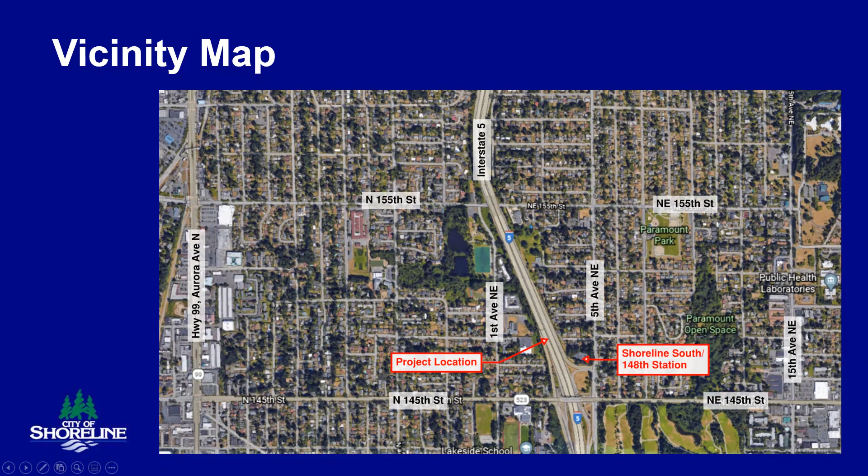Next slide. How did we get here? In 2016, the city developed a new sub area plan, which changed the density of the area. And as a result, City Council identified a need for a new crossing. And in 2017, the feasibility study was commissioned to identify the best location for that crossing, specifically for bike and pedestrian travelers. You can see that we looked at multiple different options, and the most feasible option that came out of that study is the one we're showing you today, roughly in line with 148th Street, crossing the freeway.

And then at the beginning of the design effort back in 2020, we conducted a type, size, and location analysis to identify different options for connecting from First Avenue on the west side of the freeway to the bridge landing, the different types of bridge structures themselves, and then how best to connect to the new station on the east side of the freeway.

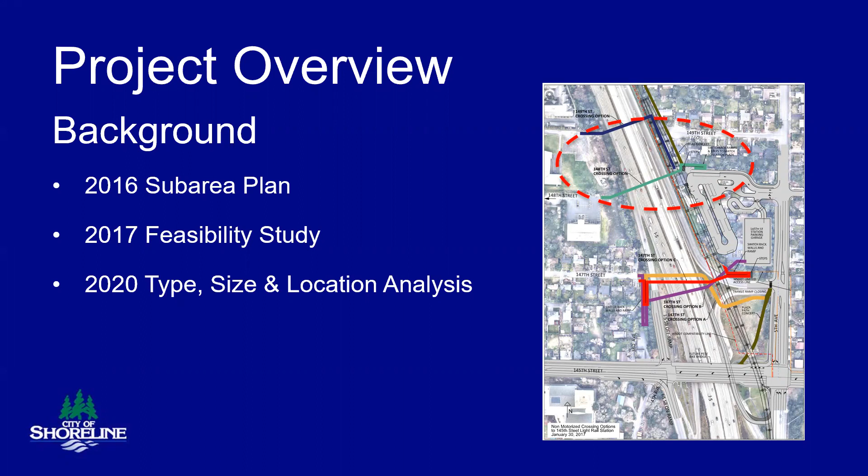The main goals of the project: ultimately provide a new link to the new light rail station, which is also considered a transportation hub. There will be future bus rapid transit. Improve safety and reduce travel times, increase walk shed and bicycle connectivity, and ultimately connect the neighborhoods on the east and west side of the freeway with a new connection.

Design evaluation criteria that has informed the design: user safety and security first and foremost, connectivity and travel times, project cost, appearance, we would like it to look good. How easy is it to operate and maintain, ease of stakeholder approval, and right of way requirements.

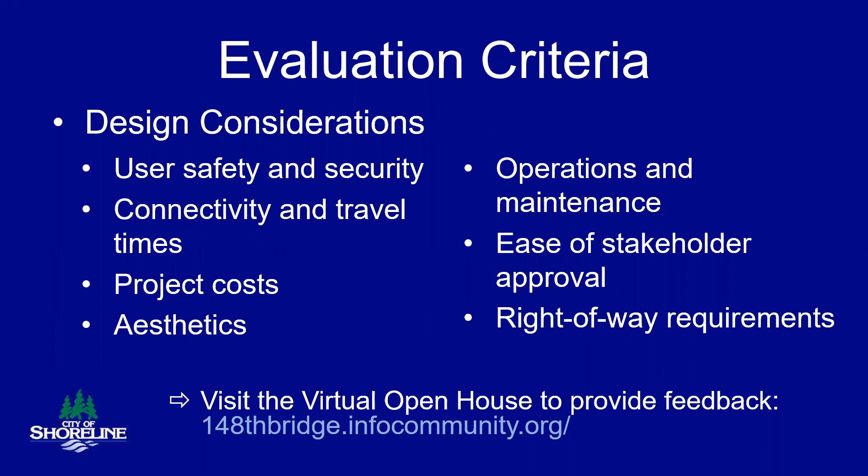I do also want to invite you, if you haven't already, to visit our virtual open house to provide additional feedback. Because as you'll see on the next slide, we do take that public feedback and we do use that to inform the design. At the conclusion of our type, size, and location effort, we collected the feedback and prepared recommendations to City Council where they selected preferred alternatives.

That feedback that we collected came in the form of direct briefings with the churches that are immediately adjacent to the landing on the west side of the freeway, and the communities on east and west immediately adjacent to the bridge. Back at the very beginning of the pandemic, we had our very first virtual open house. In that open house, we had 529 visitors with 165 survey respondents. And we also had an online presentation as part of that effort where we received 66 participants.

And for each of the project design elements, we took the recommendations that came out of all of that outreach effort, which happened to align with the recommendations that we provided to City Council. And that has informed the design where we are today, 60%.

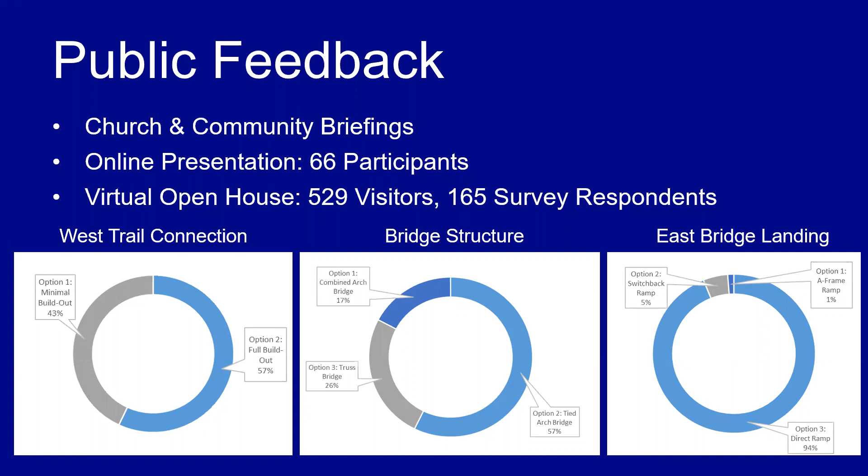Next slide. Also out of that feedback, we heard from you, the public, that the most desired project priorities are to improve pedestrian travel, maintain a safe environment, shorten travel times, preserve trees, and minimize potential parking impacts. So we definitely hear you when you're talking, and we definitely hear your concerns, and we incorporate that information into our design whenever we can.

At this point now, I'm going to turn it over to Aaron. He's going to run you through the design as it currently stands. Aaron. Thanks, Lee. So I'm going to run through the main three components of the project. Lee's already alluded to these a little bit during his introduction there.

The first component is the West Trail connection that provides an at-grade connection from First Avenue on the west side of the freeway to the bridge structure itself. I'll talk a little bit about the bridge and how it crosses the freeway, and then we'll wrap up with a brief description of the East Bridge landing and how the trail and bridge interact with the Shoreline South 148th Street station and the future trail along the rail project.

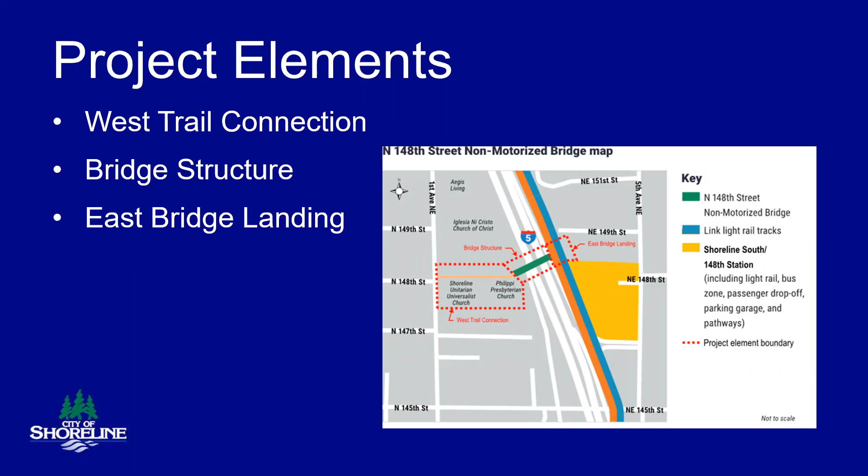Also along the trail are some proposed landscape improvements. You'll see some new trees along the south side of the trail. There's also pedestrian scale lighting in the form of luminaires or light poles along the entire length of the trail until you reach the bridge landing area, where those light poles transition to handrail mounted lights. And the whole purpose of all of this lighting is to improve user safety and security.

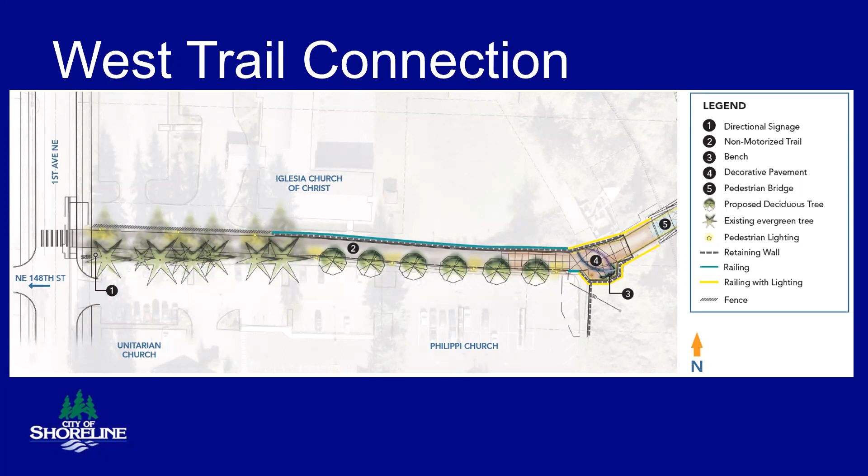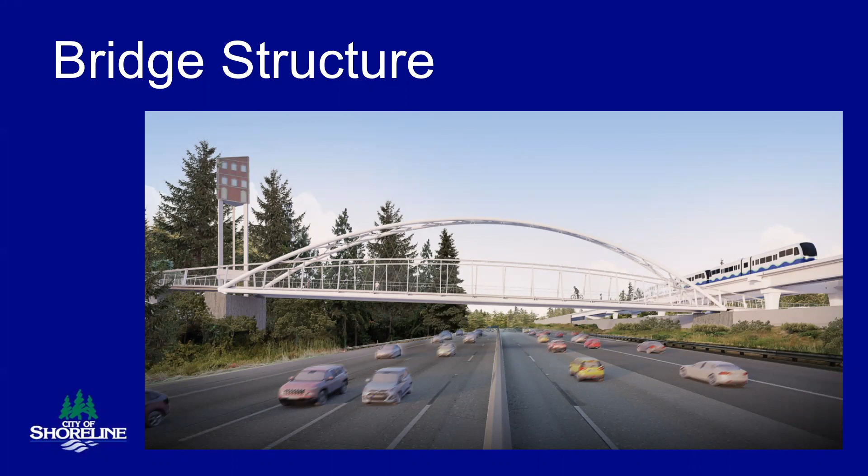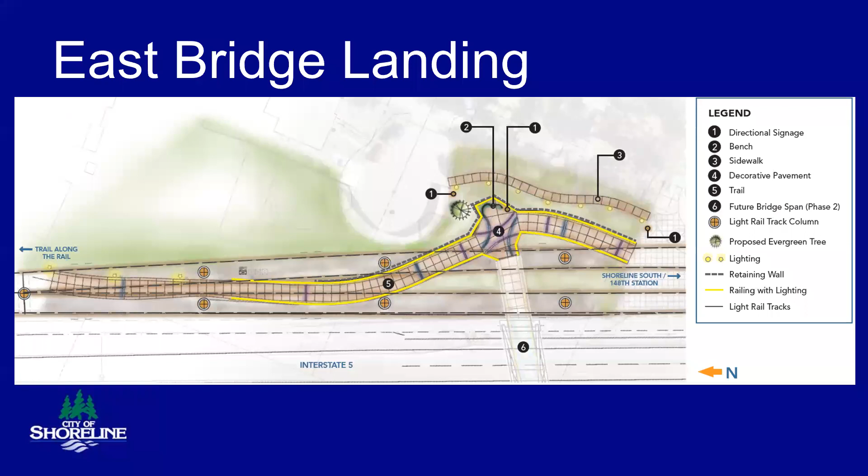All along these paths is pedestrian lighting that's incorporated into the railing for safety and security. And then as you proceed off of the trail, towards trail along the rail, that handrail lighting transitions to luminaires or light poles. In addition to the main trail connections that I just described, there's also a side trail that's highlighted with numeral 3, and that provides a direct connection from the Shoreline South Station Plaza to the 149th Street cul-de-sac, which is pictured in the middle of the screen. All around these areas are landscape improvements, plantings, trees, etc. Next screen.

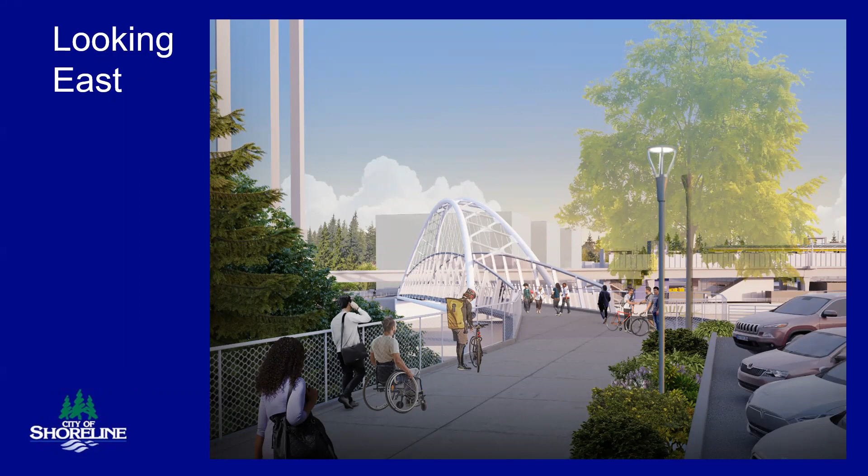Here's just a few renderings to give you a bit of sense of scale. So here we are standing on the west side of the freeway looking east. You can see the bridge in the background in the middle of the screen. Also shown there are some of the throw barriers and pedestrian railings that I described before. On the right-hand side, you can see some of the landscape planting and luminaires that I described. And then in the very back corner of the screen, you can see the light rail station currently under construction. Next slide.

Thank you, Aaron. So a high-level snapshot of current project cost. Total estimated project cost is $31 million. We do have $11 million currently secured, which leaves us with a $20 million funding gap. Because of that funding gap, we are electing to split the construction into two different phases. Phase one being everything on the east side of the freeway; the $11 million that we currently have would cover the construction cost for everything on the east side, as well as design.

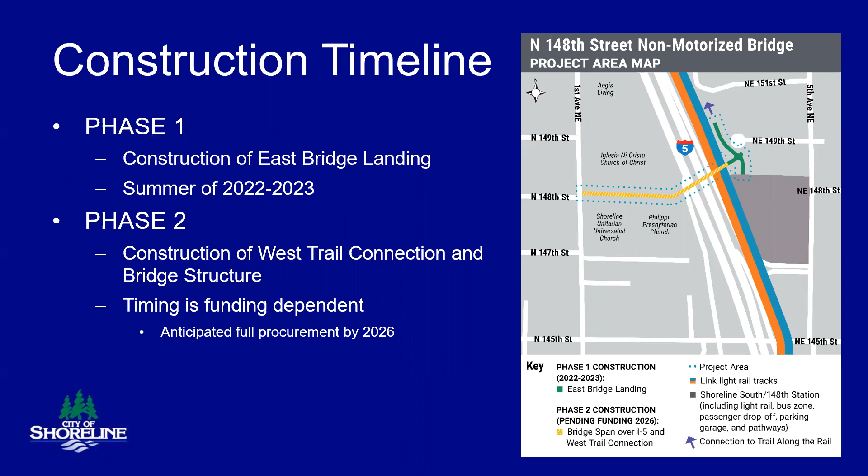So larger picture, overall picture of the schedule. Back in 2019, we began preliminary design. We're now currently at 60% design. We anticipate completion in the spring. We'll put it out to bid roughly early summer, begin construction summer of 2022, this summer, and carry over into 2023. Light rail station will open, I believe, the end of 2024 based on the current schedule.

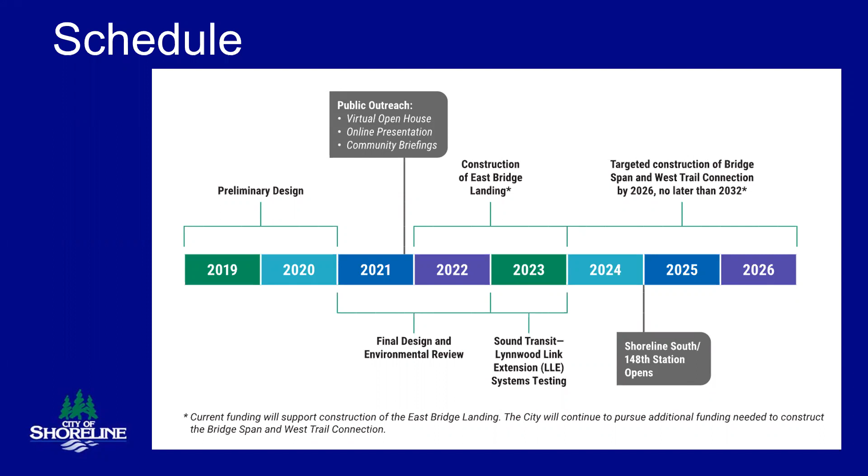So it is our goal to get that east side constructed before they get to that point. And ultimately, we would like to have the total project completely constructed by the end of 2026. But again, it is funding dependent, so to be determined. So that concludes the project specific portion of the presentation.

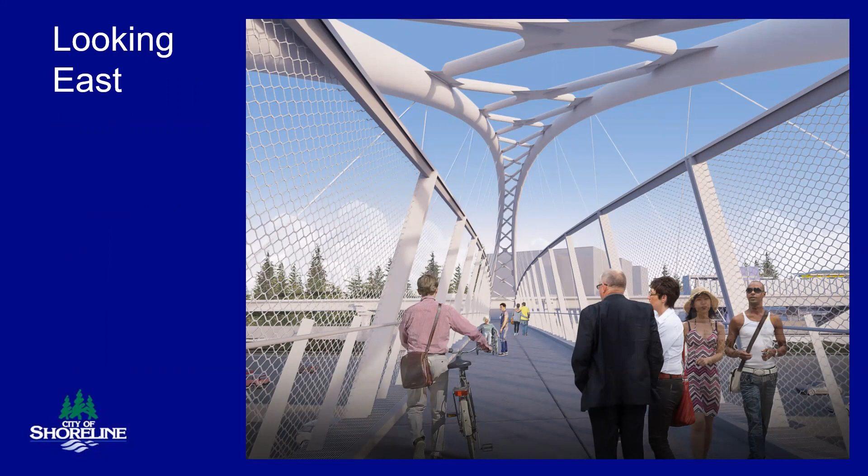Maybe go to 18. We'll have to use our imagination a little bit, but we can go to slide 18. Yeah. Back one or forward one, I guess, to the east bridge landing, looking west. One more. There we go.

Part of the reason for that removal is we have to construct the bridge in the shoulder, and when we go to place it, the trees need to be removed for the final structure as well. We've conducted a pretty exhaustive search for where we could construct the bridge that's not in the shoulder, that wouldn't require taking those trees down. There just aren't a lot of options because of all that's going on.

There's also the 145th bridge just south of this project, so we'd have to be north of that because we wouldn't be able to get the bridge over or underneath that current overpass. When we place this structure, it has to be set onto two moving vehicles that move really slowly, so the further north we get, the longer we impact I-5. There really aren't a lot of options to stage construction of this bridge.

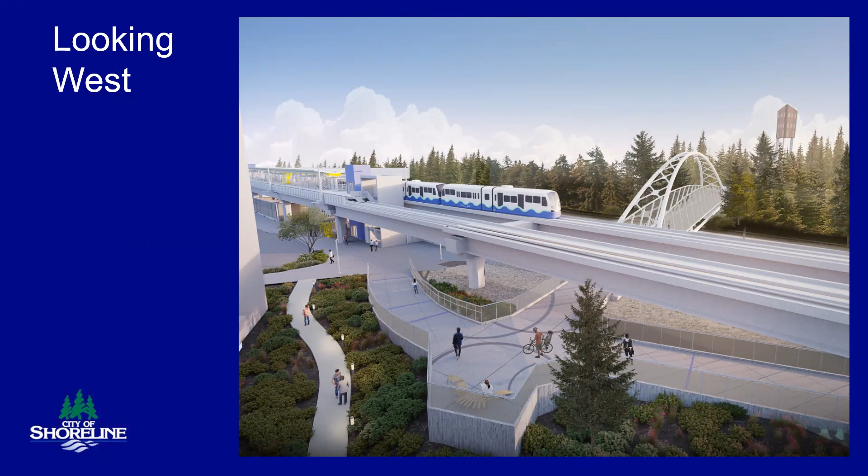Another question: does this impact the environmental protection of Thornton Creek? Aaron, do you want to talk to that one? Sure. As Lee mentioned, the staging area where the bridge will be constructed occurs adjacent to the portion of Thornton Creek that's currently underground in a culvert. Assuming this project goes first and then WSDOT's fish passage project goes later, we're expecting no significant impacts to that section of the creek because it's underground in a pipe. All of our permitting documentation being pulled together as part of this project reflects that current condition and assumption. Hopefully that answers your question.